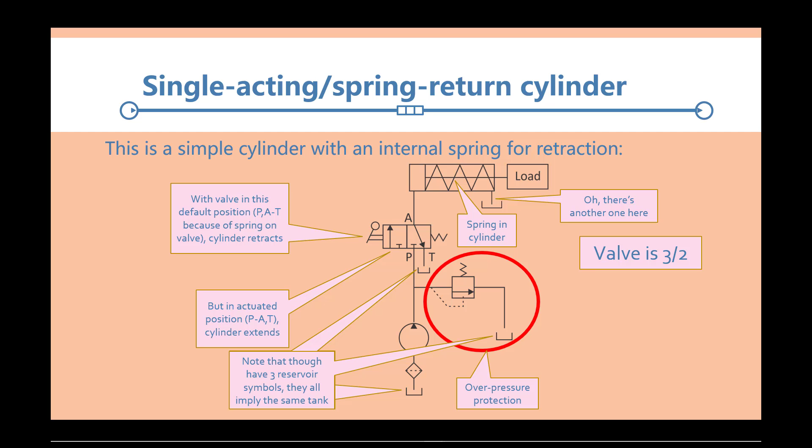So let's begin again at this slide that shows a 3x2 valve driving a cylinder to extend against the load with a spring retract.

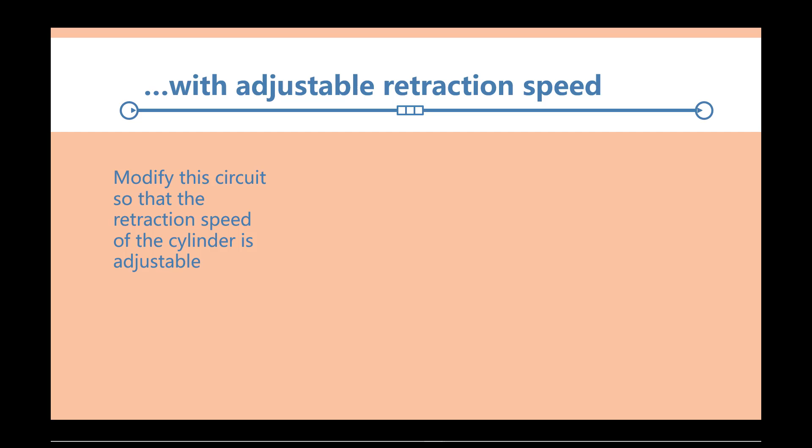Now let's modify that circuit to actually make it so that we can control the retraction speed of that cylinder. How do we do that? Well, we have the same circuit that we had before, except we now have a flow restrictor in the return line to the tank. And this is usually a needle valve, so if you crank the needle valve down, then the orifice through which the fluid has to flow gets smaller and smaller, and you can control the retraction speed of the cylinder through that methodology.

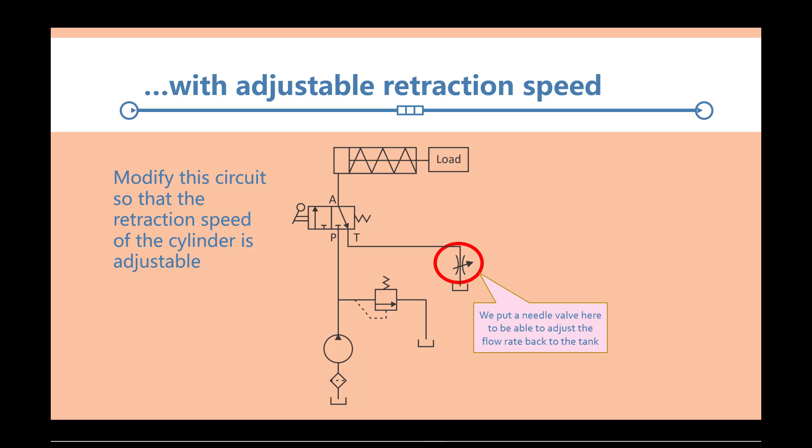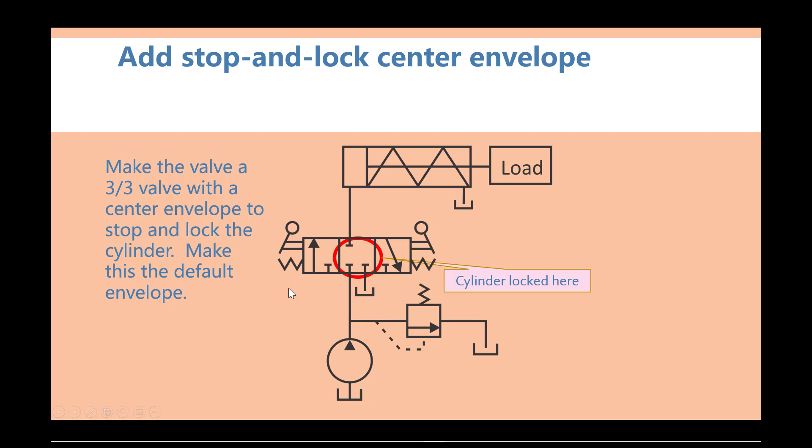So now another thing: we actually have a fairly simple system with this spring retract for the cylinder, but we pay a price for that. As the cylinder extends, it pushes against the spring, and when you start out, the spring is compressed very, very little. So the force that you can deliver with your pressure acting over this area is actually pretty high. But the further you push, the more you compress that spring, and the spring force depends upon the spring constant K and the deflection X. So the further you push, the greater force you get coming back from the spring.

So our force that we're delivering out to the load is the pressure times the area of the cylinder, which you'll see in here. But then you have a counter force that's pushing to the left. That's the force of the spring. So you can't deliver the entire pressure force on the piston to the load. You can only deliver part of it because you have to fight against the spring also. Okay.

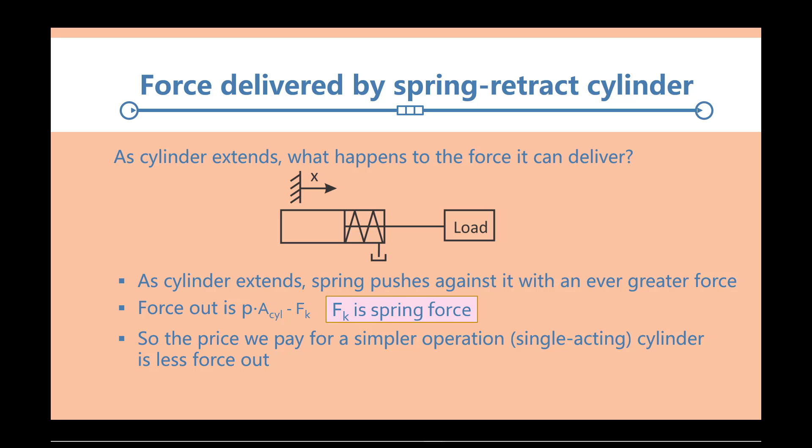So this is a sort of a guiding principle here. We have a simpler system with our cylinder. It's what's called a single acting cylinder, in that you actuate it only in one direction. But there's less force that you can actually apply with this cylinder because of the spring retract. So you simplified it, but you paid a price for it.

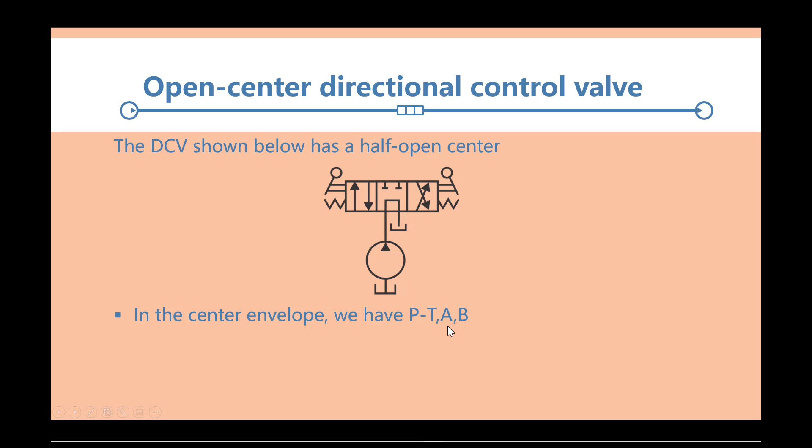And the way that you write this is we have P connected to T, and then we have A and B, each one alone, blocked. So this is the shorthand designation for that. The cylinder is locked, but the pump is unloaded. Okay? We don't develop pressure, so the pump load is absent. We don't develop pressure here.

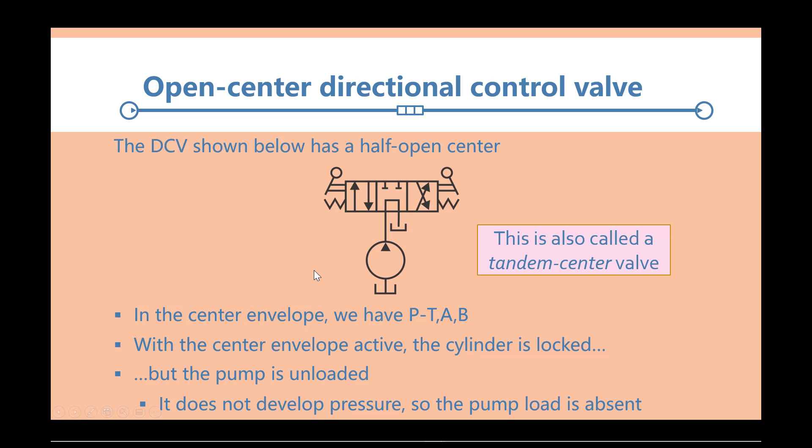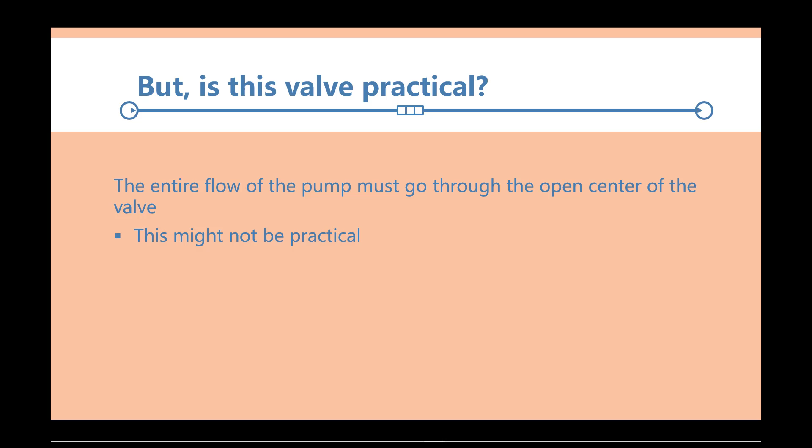There'll be a little bit of pressure because you do have channels through which you're flowing back to tank, but it'll be very little. This is also called a tandem center valve. You'll see that designation sometime. One problem with this valve, though, is that all of the pump flow, when it's in the center position, the default position, has to go through the open center, and so you would have to provide a very big internal pathway from P to T for that open center, and that might actually not be practical. The valve would have to be very big.

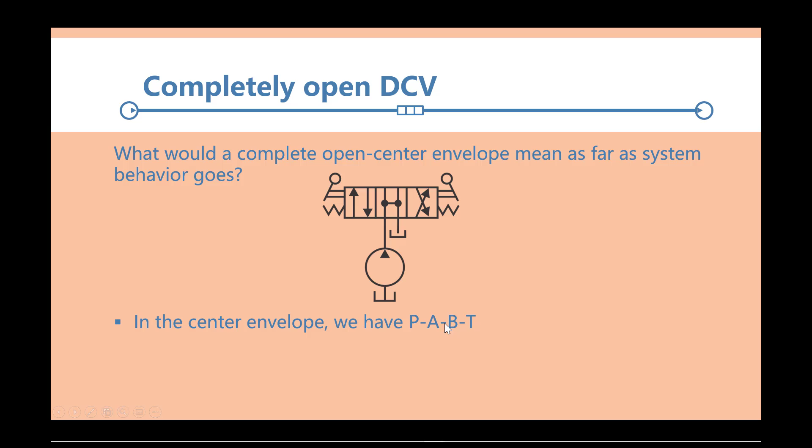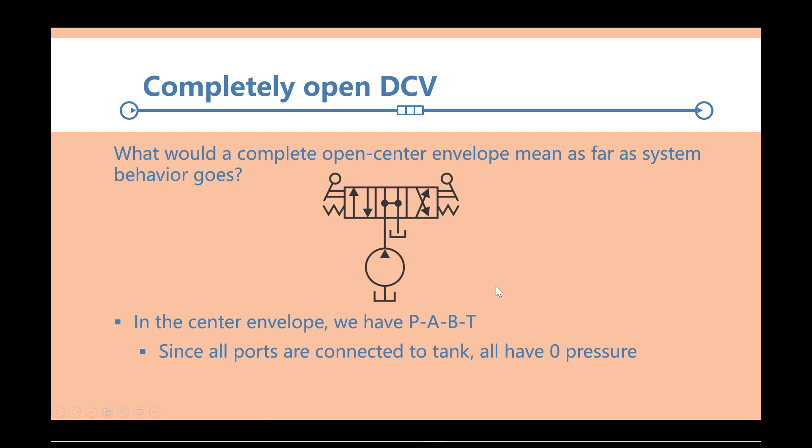So the way we designate this, since all the ports are connected, is you just put P-A-B-T. That means all of them are connected together. And since they're all connected to tank, you have basically 0 or very negligible pressure at every port. Again, you will have some drop between P and T because of the restricted channels through which the fluid's going to flow from the pump back to the tank. But essentially, you're not building any system pressure. The cylinder's not locked and it can move freely.

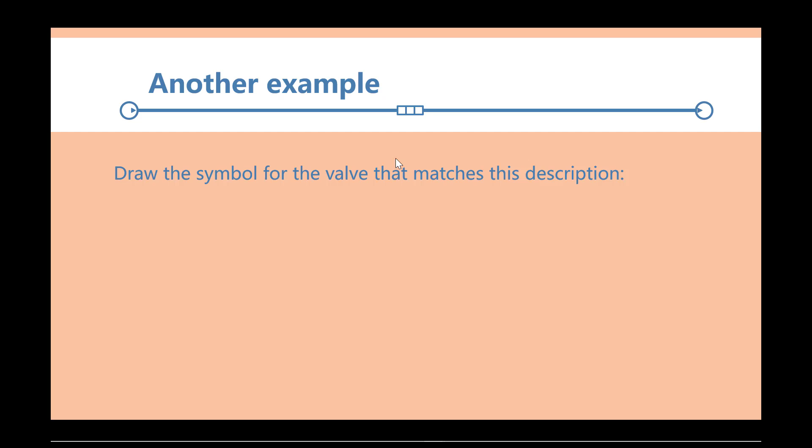Okay, now what I want to do is give a description here of a valve, just in English, and see if you can figure out what type of valve to draw. So this is a solenoid actuated, spring-centered, 4x3 valve with built-in overpressure protection through a half-open center. Okay, so pause the video and try to draw that. Go through each one of these and try to put it on paper.

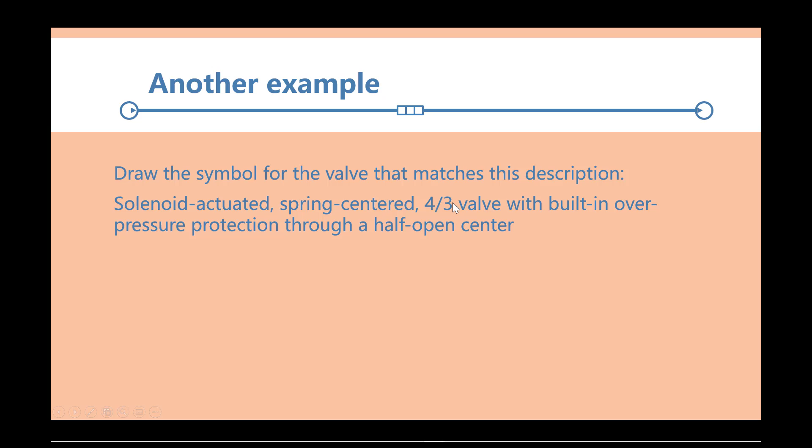If you do that, you wind up with this gizmo here. So let's look at each one of them. Solenoid actuated, there it is right there. There's a solenoid there and there's a solenoid there. That indicates that the solenoids can shift it from the center position. The center is the default because of the centering springs shown on the end. So this solenoid can actuate it so that the left-hand envelope is active, and this solenoid can actuate so that the right-hand envelope is active.

So if we have this being extension and this being retraction: if you do nothing, then you just have the pump flowing to the tank and the cylinder locked. If you actuate this solenoid, then you extend the cylinder. If you actuate this solenoid, then you retract the cylinder.

And this can be characterized, since we have the three envelopes, each envelope has its own connections. Since we have a 4x3 valve, we're going to have 4 letters, and then 3 groups connecting these letters together. So in the left-hand envelope, P is connected to A, B is connected to T. In the center envelope, P is connected to T, A and B are separate. And in the right-hand envelope, P is connected to B and A is connected to T.

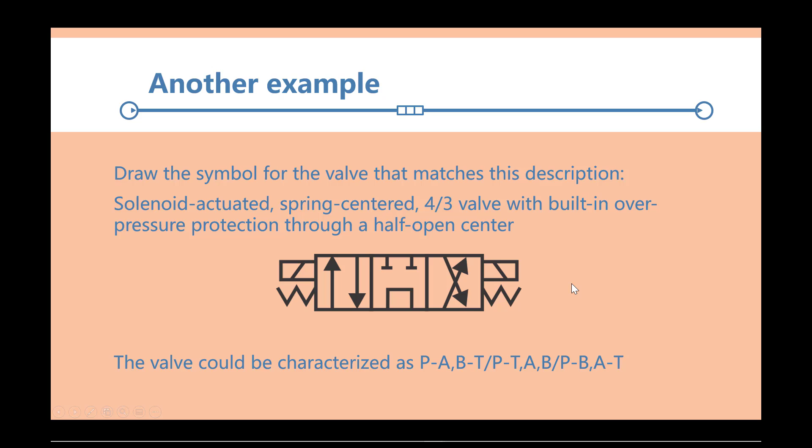Okay, I want to talk about filters a little bit, but I'm going to stop here and start a new video. So we'll have, I think, 3 in this series.